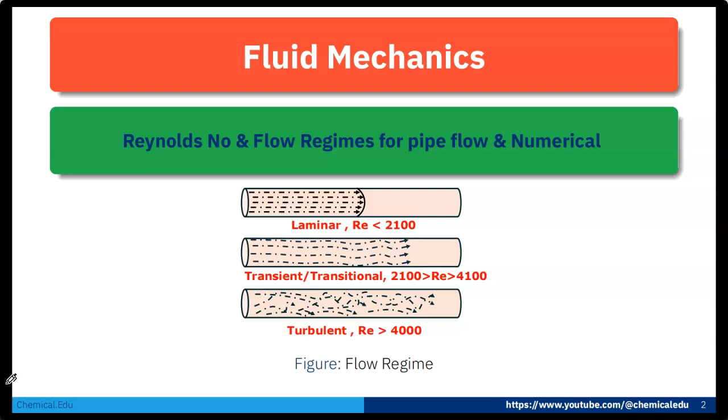Today I am going to discuss fluid mechanics by exploring Reynolds number and flow regime for pipe flow, and I'll solve one numerical problem on Reynolds number. Let's get started. So here is the Reynolds number definition.

Reynolds number is a dimensionless quantity used to predict fluid flow patterns in different situations. It is defined as the ratio of inertial force to viscous force within a fluid flow. It is instrumental in predicting the transition between laminar and turbulent flow regimes. The expression for Reynolds number is given by Re = ρVL/μ.

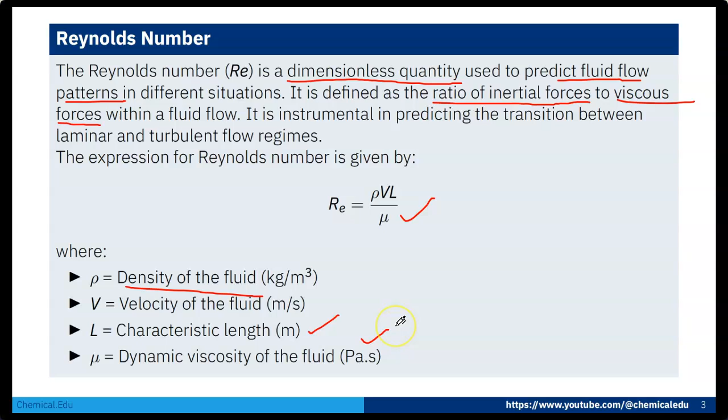Here ρ is the density of the fluid, whose unit is kg per meter cube. V is the velocity of the fluid, in meter per second, L is the characteristic length in meter, and μ is the dynamic viscosity of the fluid, whose unit is Pascal second. Now we know that Reynolds number is nothing but inertial force by viscous force. It is the ratio of inertial force to viscous force.

Now what is inertial force? The inertial force Fi is mass into acceleration, from Newton's second law of motion. Here mass is nothing but ρ into volume, density into volume, and acceleration is velocity by time. So ρ stays as it is, the volume is area into length, and then velocity by time.

Now if I reorganize: ρ, then area, then length by time, multiplied by velocity. Here length by time is nothing but velocity, so it will be ρ into area into velocity, so ρAV², where A is the cross-sectional area. Okay, so now we got the inertial force.

Now coming to the viscous force Fv. We know that τ is shear stress and du/dy is the velocity gradient. From Newton's law of viscosity, shear stress is directly proportional to velocity gradient. So viscous force is shear stress into area, and shear stress is μ into du/dy, times area.

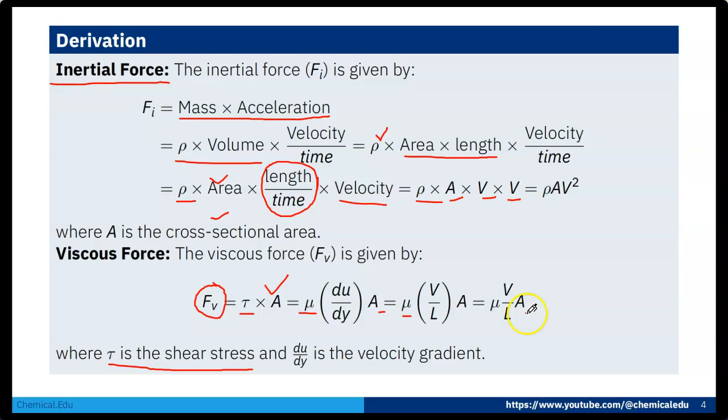Here μ is as it is, and from the two parallel plate problem we know that du/dy can be written as V/L. So Fv will be μ into V/L into A. By the definition of Reynolds number, inertial force by viscous force, we plug in all these values and finally get Reynolds number equal to ρVL/μ.

Now for Reynolds number in pipe flow, the characteristic linear dimension L is taken as the diameter of the pipe d. So Reynolds number becomes ρVd/μ, where ρ is the density, V is the velocity of the fluid, d is the diameter of the pipe, and μ is the fluid dynamic viscosity.

Alternatively, we can also write Reynolds number using kinematic viscosity. Kinematic viscosity ν is μ/ρ, so 1/ν means ρ/μ. So Reynolds number is Vd/ν, where ν is the kinematic viscosity, with unit meter square per second.

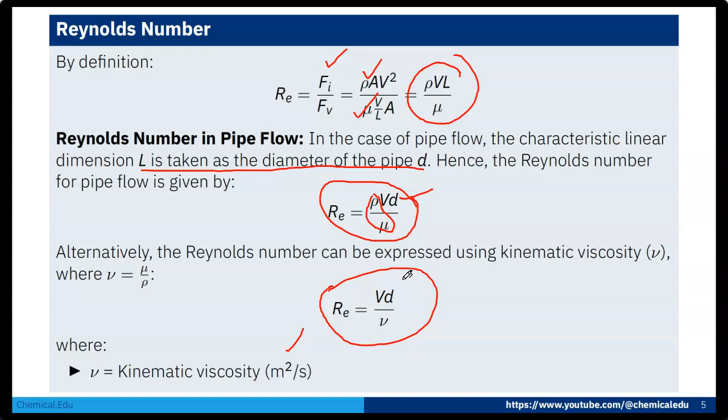So we know the Reynolds number definition, and how to derive it from inertial force by viscous force, and we got the expression. Now coming to the flow regime for pipe flow. Here I am showing one picture.

Suppose fluid is flowing through a pipe. When fluid is flowing through the pipe, the flow is layer by layer. When the layers are not mixed, it is a very smooth flow. That is actually called laminar flow.

Now when the flow has just started to mix, that is called transient or transitional flow. And when the flow is chaotic, when layers are mixing with each other, that is called turbulent flow.

Now from the Reynolds number we can easily characterize the flow regime. Reynolds number is nothing but rho V d by mu. So if we know the diameter of the pipe, the fluid density, fluid viscosity and the velocity, we can easily calculate the Reynolds number.

When the Reynolds number is less than or equal to 2100, that is called laminar flow. When 2100 < Re < 4000, that is transition flow, and above 4000, that is turbulent flow. So from the Reynolds number we can easily characterize the flow regime.

So what is a real life example? The real world connection is here. In pipeline design, suppose we are chemical, mechanical or civil engineers, we can easily do the pipeline design.

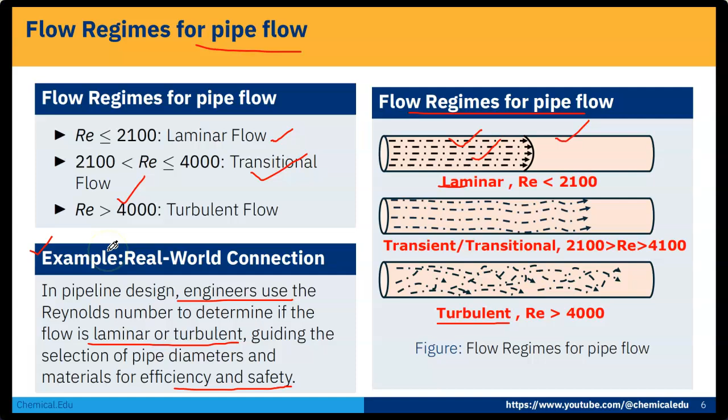So what do engineers actually do? Engineers use the Reynolds number to determine if the flow is laminar or turbulent, guiding the selection of pipe diameters and materials for efficiency and safety. So that is the real life example of Reynolds number. We can characterize the different flow regimes.

Now we are going to solve one numerical problem: first calculate the Reynolds number and then determine the flow regime. Here is the problem statement. Diesel with a density of 0.832 kg per liter and a kinematic viscosity of 9 centistokes at 40 degrees centigrade flows at a rate of 5 kg per second through a tube with a circular profile and a diameter of 120 mm. Calculate the Reynolds number and determine the flow regime.

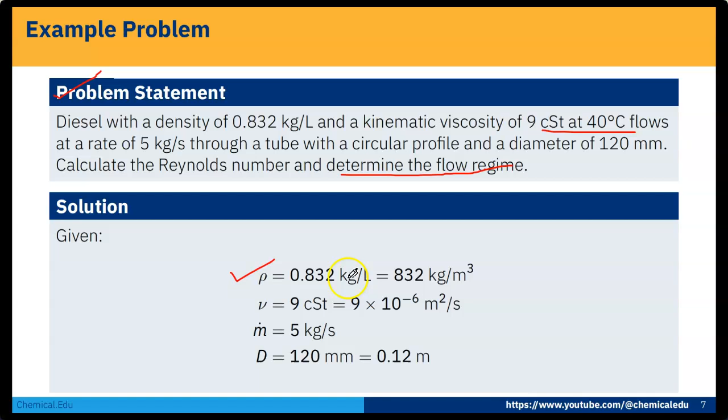First, density is 0.832 kg per liter. To convert from kg per liter to kg per meter cube, we multiply by 1000, so that will be 832 kg per meter cube. Now nu, the kinematic viscosity, is given as 9 centistokes. Converting to meter square per second, that will be 9 × 10^-6 meter square per second.

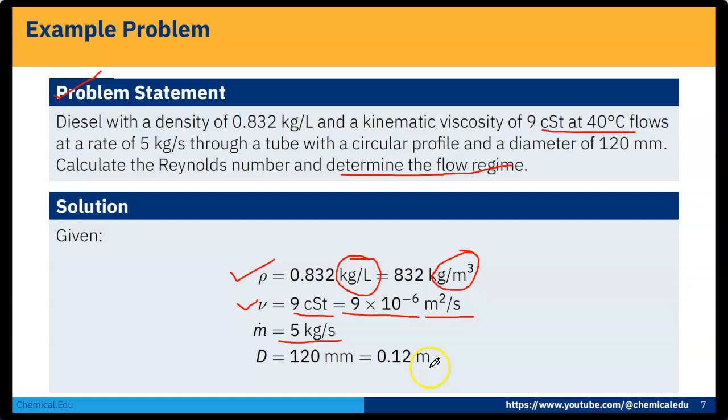The flow rate is given as 5 kg per second, so that is the mass flow rate, and the diameter is given as 120 mm. Converting mm to meter, that will be 0.12 meter. Since the mass flow rate is given, we first calculate the velocity of the fluid using the mass flow rate.

We know that mass flow rate is nothing but rho × A × V. We know rho and the pipe diameter, from that we can easily calculate the area, and then finally V. Here A is the cross sectional area of the tube, which is pi × (d/2)², that is pi/4 d². Putting in the values, we get the area as 0.0113 meter square.

Then we solve for velocity. Velocity is mass flow rate divided by rho × A, so that will be 5 divided by 832 × 0.0113. Doing the calculation, the velocity is 0.55 meter per second.

After getting the velocity, we can easily calculate the Reynolds number. Reynolds number is V d by nu. We know the velocity, d, and the kinematic viscosity nu. After plugging in all these values, the Reynolds number is 7333.33.